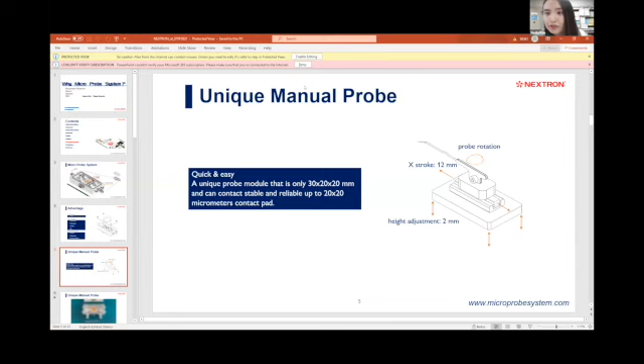Could you see my screen? Perfectly.

Good morning, everyone. I'm Nadia Kim of Nextron headquarters in Korea. First of all, it's an honor for me today to give a presentation to all of you. I also thank Professor Pascal for giving me the opportunity to introduce our product at the DTIP conference.

What I'm going to talk about today is the microprobe station, our main product. I hope you can find the answer to why microprobe systems.

I will begin by briefly looking through the contents of my presentation. Firstly, the overall explanation of the microprobe system: what is a microprobe system, and the distinguishable features and advantages over usual probe stations. Secondly, I will move to the specific model and options of the microprobe system. Lastly, I will look at the applications and customers of our product.

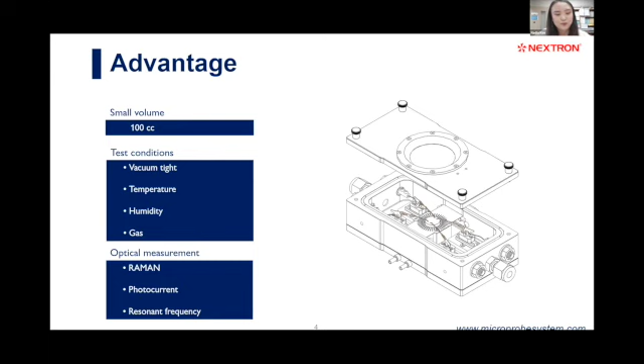The unique probing method is the most interesting point of the microprobe system. You can move the probe in any direction freely. It has a special spring structure, so it holds the sample on the stage while making electrical contact at the same time. Let me show you a short video clip showing how the probe works.

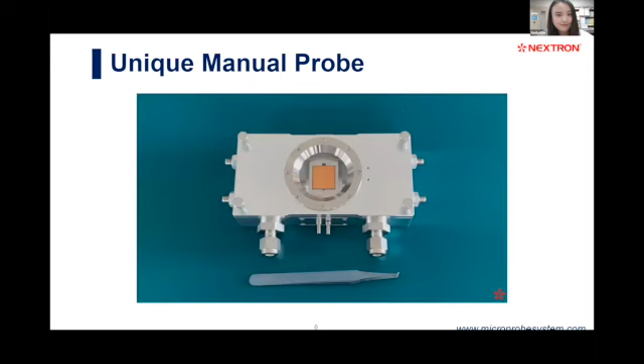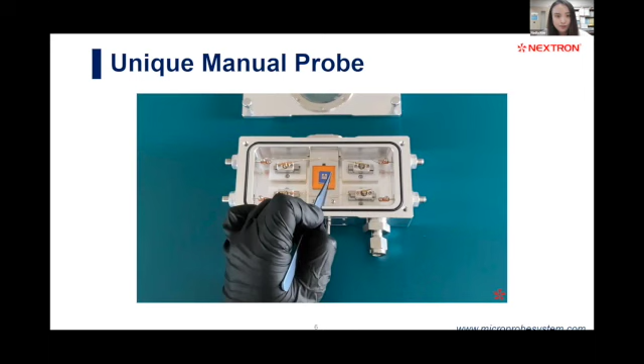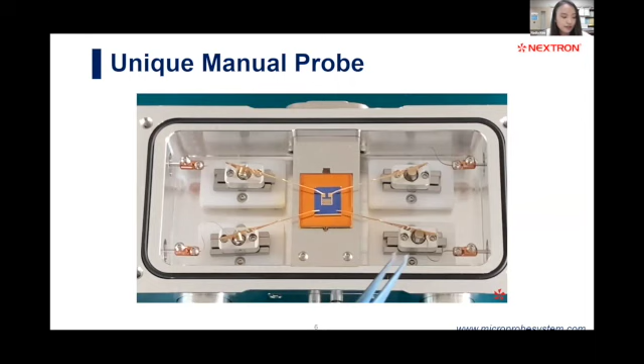First, place your sample on the stage, and you can move the probe with your hand like this using tweezers. It keeps stable contact even when the sample is moving.

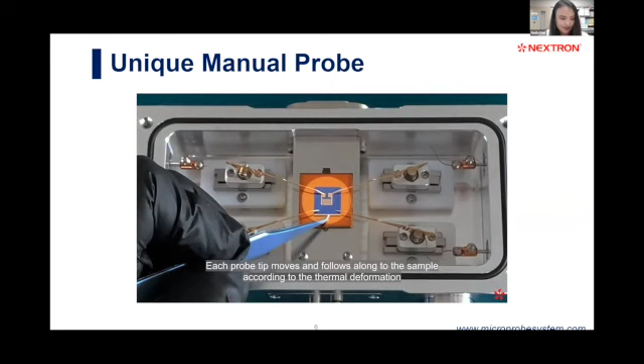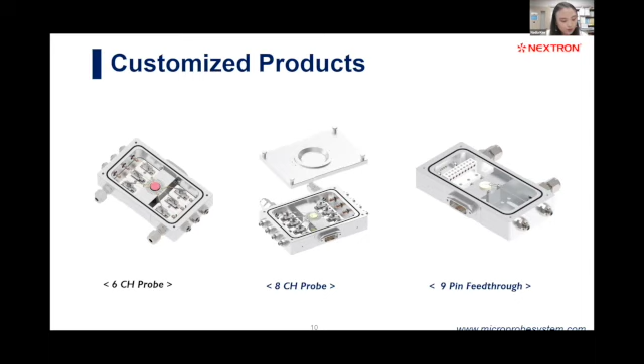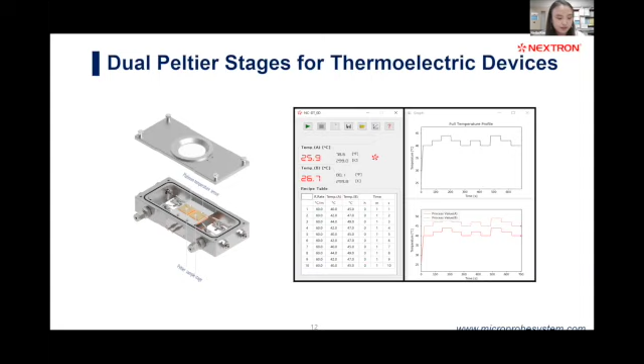This one is a dual Peltier stage for thermoelectric devices. You can make a temperature difference on the same sample during the measurement.

This is a subsidiary option for humidity control. A humidity sensor will be installed in the chamber, and the humidity will be controlled by getting a real-time feedback value from the humidity sensor.

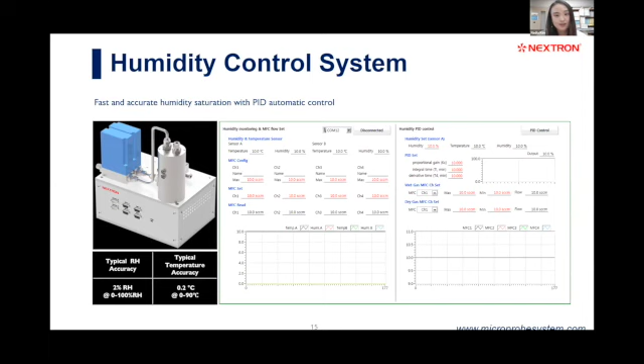This cute stage is the AFM cooling and heating stage. It can be used in AFM.

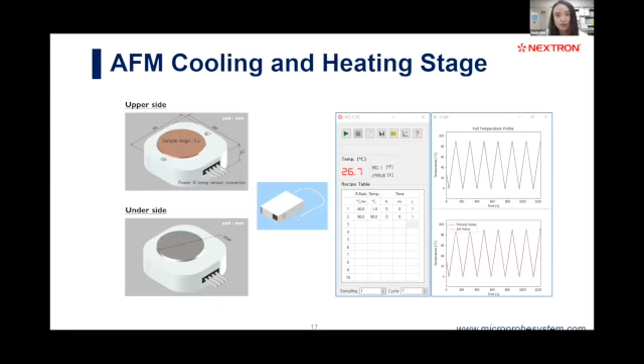This is one example of an application compatible with the microprobe system. The equipment in the picture is a vibrometer from Polytec. As shown in the graph on the right side, you can get sharper data when controlling the test condition using our chambers.

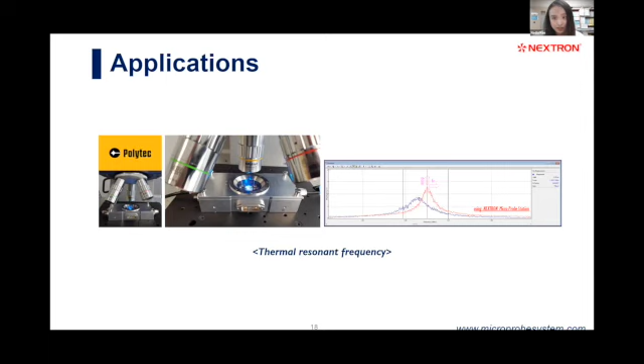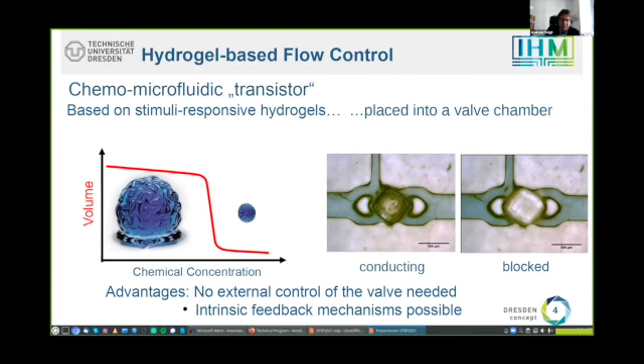The advantages of using this method are that we don't need any external control for the valve—for example, no external air pressure or control unit—and that we can employ intrinsic feedback mechanisms.

I will point out the electronic-hydraulic analogy. Like we have electronic circuits, we can also draw fluidic circuits, and there are analogies or isomorphisms between quantities. So pressure in microfluidics corresponds to voltage in electronics. The flow rate in microfluidics corresponds to current in electronics. And just as there are electrical resistors, there are also hydrodynamic resistors.

However, there's one main difference: there is no equivalent to chemical concentration in electronics. This main difference has an impact on the design of such systems, and also on the computer-aided design methods that we develop for it.

We can couple the disciplines of chemistry and fluidics, coupling the chemical domain to the fluidic domain. To couple from concentrations to flow rates, we use our chemofluidic transistor, because the size of the hydrogel depends on the concentration. If we change the concentration, the resistance of the transistor will change, so that in the end, the flow rate coming out of the transistor depends on the chemical concentration.

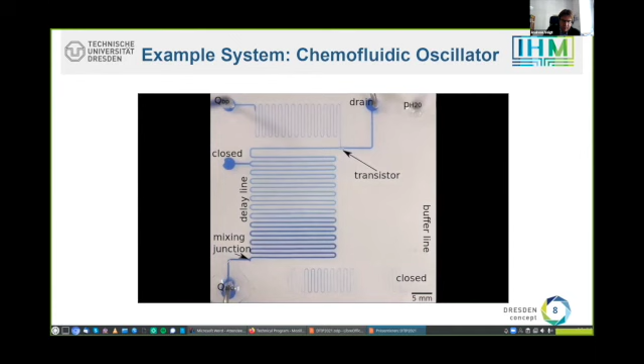Now that we know what hydrogel-based microfluidics is, I will explain our computer-aided design method. The idea is to use a schematic design. In this schematic, you see the oscillator: we have components like the buffer line, the mixer, the delay line, the chemofluidic transistor, the bypass line, and also the pumps. These components are connected by connection lines.

The blue lines correspond to flow rate-pressure pairs, which is the conservative quantity, and for the concentration we use signal flow quantities. The components are described in the hardware description language Verilog AMS, where AMS stands for Analog Mixed Signal. As a design framework, we use Cadence Virtuoso, which is usually used in electronic design automation.

The advantages of using such a schematic design instead of a full 3D description with partial differential equations and finite element methods are, first, that we have a reduced number of degrees of freedom, which means our simulations are very fast. Also, the schematic design is very intuitive, because we simply need to place the components like an electronic circuit, connect them, and then simulate the behavior.

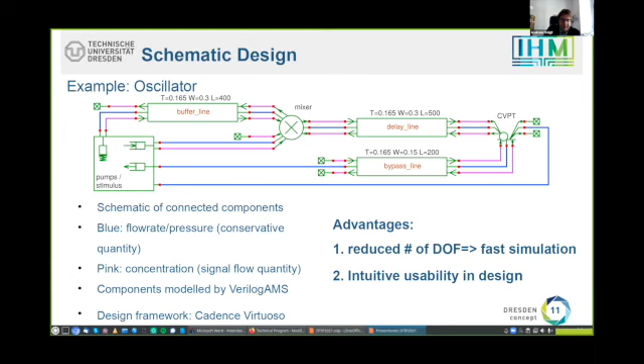I will explain how the different components are modeled. The microfluidic channel has two effects. The first effect is that it acts as a hydrodynamic resistance, so the flow rate that goes through the channel is calculated by the pressure divided by the hydrodynamic resistance. This is realized via the analog part of Verilog AMS.

The second effect is a transport delay. A concentration that comes into the channel needs some time until it is transported to the end of the channel, and in the channel there is a concentration distribution which is shifted along the channel due to the flow rate. This transport delay was realized via the digital part of Verilog AMS, because we need to keep track of the internal state of the concentration distribution. This realization, and also the coupling of the analog and digital parts, were the critical issues for the microfluidic channel.

The mixing junction has two incoming flows of flow rates Q in 1 and Q in 2, which carry concentrations C in 1 and C in 2. Then there's the channel for diffusive mixing. And the resulting concentration at the output is simply the weighted average of the concentrations, weighted by the flow rates that are coming in.

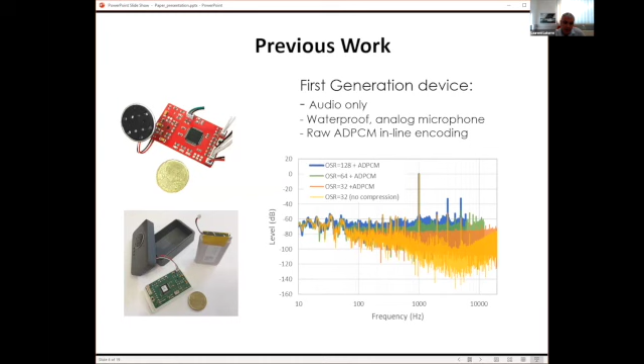We studied the effect of this compression on audio quality depending on other parameters, mainly the audio sampling rate, and we can see how the noise floor moves depending on the parameters, with and without this ADPCM onboard compression. So that was a contribution, and what we demonstrated, which was nice to see, is that doing the audio compression on board actually saves power, because doing that we have less data to store onto the mass storage, which is an SD card in our case. Most of the power consumption comes from the writing operation onto the SD card, so by reducing the amount of data to write, we actually save power, and it's better even if you include the extra power needed on the CPU to perform the compression.

So actually we could save about 30% of power when we compare with and without compression. And that allows us to develop an audio recorder that was very low in terms of power consumption, like 6 milliwatts. It was like one order of magnitude better than what you could get on the market at that time. So that was the previous work.

And what I present today is the second generation of these loggers that we call XLM, because in addition to audio recording, we also provide accelerations and magnetic field recording.

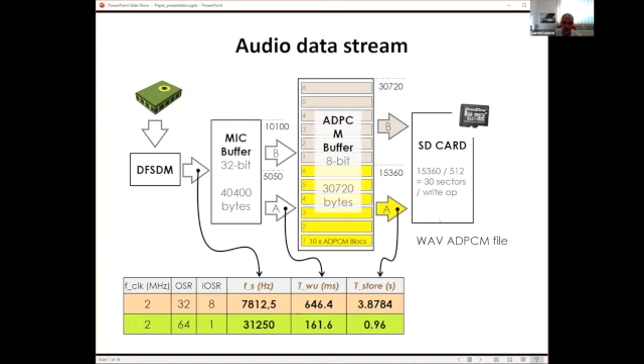And what we write on the SD card is a fully compliant WAVE ADPCM file. It's based on the Microsoft standard. So the file can be read directly on software like Audacity - a freeware that many people use in the research community. But we had to modify slightly the standard header of the WAV file to include a time code, and we do that to be able to align data with the inertial data that we collect besides audio data. So we investigated several possibilities, and we found a location in the header where we can put an extra field, which is a 4-byte field. So it's a 32-bit time code based on a hardware count, and that is used to timestamp the audio data.

So regarding the other sensors, we have accelerations and the magnetic field. Those are coming from the inertial device eCompass from ST. The buffering scheme is much simpler because we do not process the data - we just store raw sensor information into the SD card. Every sample, so every 3D sample made of X, Y and Z, is also timestamped by the same time code as we use for audio, and that's for the alignment. We have a fixed configuration of 50 Hertz output data rate for the accelerometers and 10 Hertz output data rate for the magnetometers, which leads to a write onto the SD card every 10 seconds for accelerations and every 50 seconds for the magnetometers.

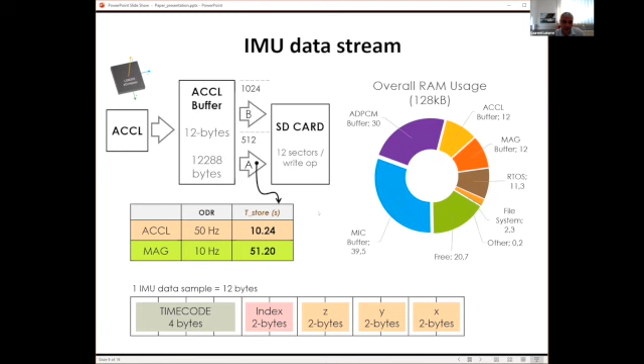When you look at the overall RAM usage, you can see that almost three-quarters of the available RAM, so 75%, is dedicated to sensor data buffering. What remains is for the rest of the firmware. Half of the total available RAM is dedicated to audio, because this is where we have the higher data rates, of course.

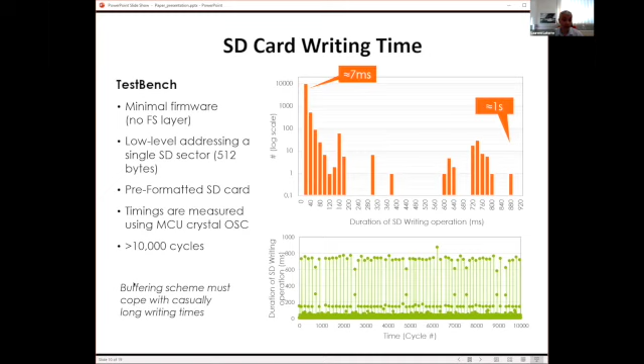We have very long writing times, and that's not under our control, because that's something that is performed inside of the SD card itself. It's the controller inside of the SD card that does some housework. We don't know exactly what's inside, but we have to cope with very long writing times. So that's something I wanted to point out, because it's something that we have to deal with.

Regarding the overall firmware architecture, given that we have 3 sensors that provide data asynchronously, the IMU has its own oscillators, and when it has data available, it just sends an interrupt to the microcontroller, and then we have to collect the data. Because of that, and because of the unpredictable SD writing times, we needed a strategy where we can use the CPU resource where it's needed, when it's needed, and only that.

For that, we used an RTOS, to be specific, FreeRTOS. Using this, we can lower the CPU frequency. We use 4 megahertz when we consider the low-fi use case, and that allows us to reduce the power consumption. During the recording process, we have 3 tasks running in parallel. Each of these tasks is just buffering the sensor's data: audio, acceleration, and magnetic fields.

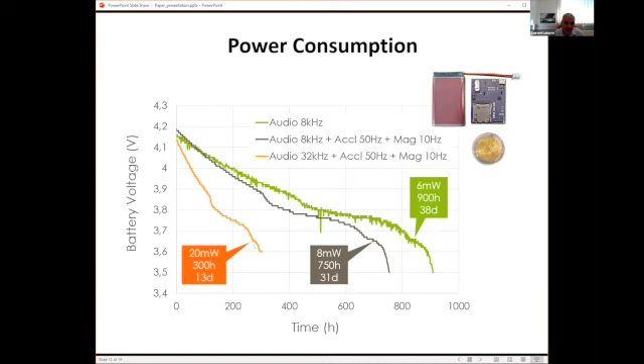The second curve, obtained with the second device using the same battery, also records accelerations and magnetic field. We have, of course, a reduced autonomy, but that's still quite good, with 8 milliwatts of power consumption and up to 1 month of full-time recording. When we consider the high-fi case of 32 kilohertz audio data rate, the autonomy is cut by more than half, but still we're close to 2 weeks of full-time recording. It has some applications, maybe not with wild animals, but with domestic animals. We have a collaboration with another research team that studies horses, and they use that high fidelity configuration.

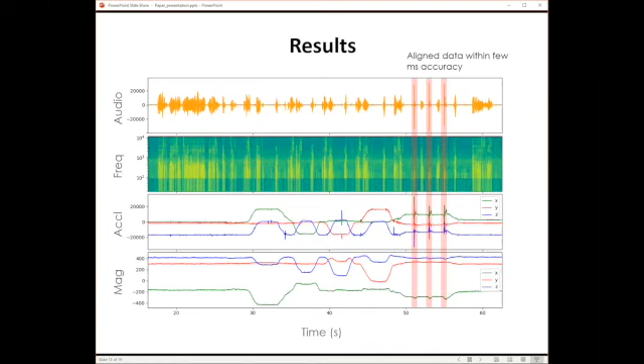Another thing that we can get from the loggers as post-process: we collect the data on the SD card. I didn't mention, Laurent, you are running a bit over time, so this can be my last one.

Okay, so the device is not communicating. We get the data from the SD card, and what I just want to show on this slide is that the data is perfectly aligned, and that's what we wanted to do.

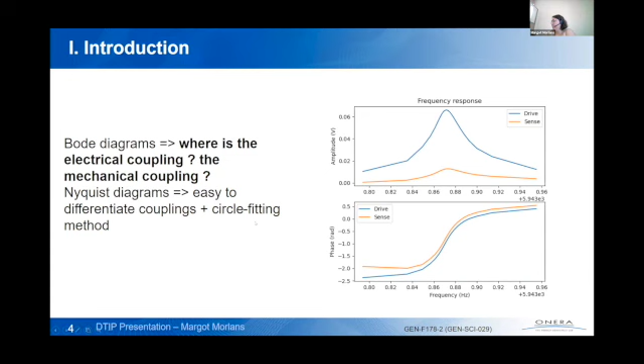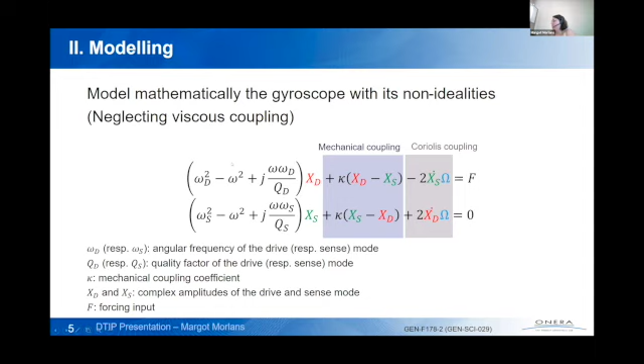So we see that in the first equation, we want only the drive component, XD, but we have a small amount of the sense signal, XS. Similarly, we have some drive signal, XD, in the sense signal, which is also mechanical coupling. These equations translate into circles when omega is near the resonance frequency. For feed-through, we have another model, which is right here.

We can see that the output of the drive mode isn't only XD, but there is also a bit of capacitive coupling here. So we have a small amount of V in. This is not a rotation. It's not due to misalignment in electrodes or any design errors. It is really due to a small capacitance between pins on the cell.

So our method: as said before, we know that when omega is around its resonance value, data points may be represented as a circle. Here we use the Kasa-Coope method for the circle fitting, which consists in minimizing the distance between a data point and a circle point. Our algorithm will find the best circle answering this constraint. When we obtain the circle, we will see later how we can differentiate mechanical and electrical couplings quite easily.

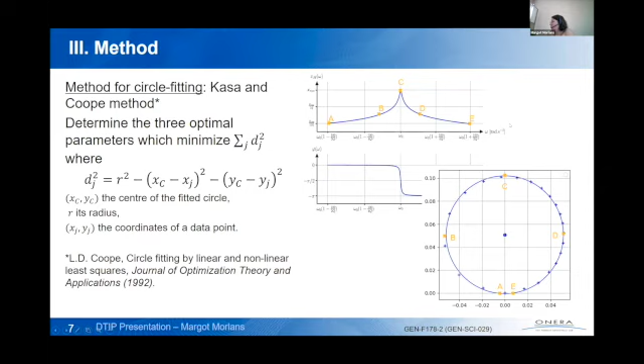Here we have both Bode and Nyquist representations, and we can see that we have 5 remarkable points. They are all on the amplitude diagram of the Bode representation, and the 5 are present also on the circle. So it's interesting to see that these both representations are 2 different things for the same data and the same equations.

So here is a simulation example to illustrate our method. We see here that on the Bode representation on the left, it is quite impossible to differentiate mechanical and electrical couplings. We can see that there may be some couplings, but we don't know what effect is due to which coupling.

However, on the Nyquist diagram on the right here, we can easily detect these couplings. The feed-through, for example, is seen here in the relative position of both circles. So here you have what we call the foot of the circle, and here also, and this relative distance is the electrical coupling. The mechanical coupling is represented by the size of the small circle.

Actually, the big circle, the blue one, is the drive circle, while the small circle, the red one, is the sense circle, as written here. The diameter of the small circle, the sense circle, represents the proportion of mechanical coupling. There is also an angle here between the circle axis and the real axis. This angle is the phase shift provided by ZD and ZS that we saw earlier.

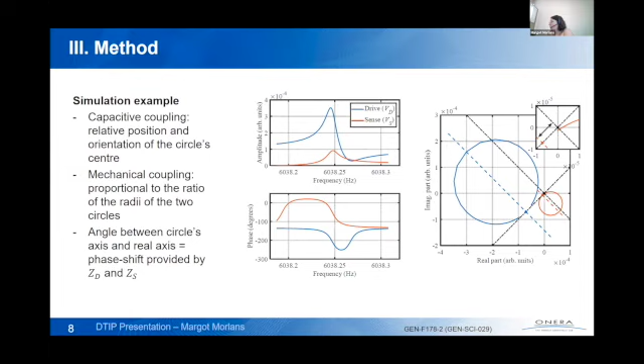Here we have a 45-degree angle for the phase shift. It is an arbitrary value for the sake of the simulation, but in real cases it may be really different.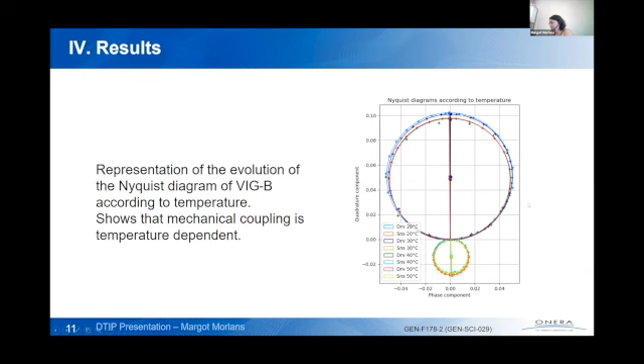So to conclude about this work and about the perspectives, the Nyquist diagram is a really useful tool for qualitative insights and quantitative characterization of electrical and mechanical couplings. It can be used to determine other parameters, such as quality factor or resonance widths. In the next months, we want to use this method to characterize matched mode gyroscopes, and we also want to investigate ways of accelerating the characterization process.

Thank you for your attention, and if you have questions, don't hesitate.

Thank you, Margot, for this clear presentation. Do we have any questions in the room?

No? This is the startup of the conference. People are... Okay, I have a small question or comment.

The idea of this paper is based on the fact that the phase is a more useful parameter to discriminate between the mechanical coupling and the electrical coupling, if I have understood well. Is it right? Actually, it's just the way.

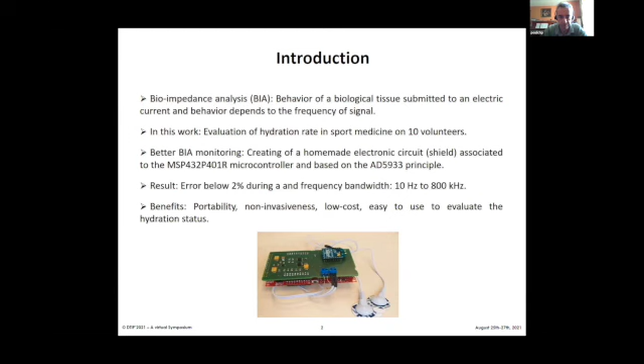So the principle of the determination is placed there. Outside, of course, is placed biologic cells, and we have two electrodes that communicate and are linked to the biologic cells. On the animal or on the patients, it's supplied with a battery, and there's a link with RF communication to the computer. When the measurement is done, it's stored on the computer, and we can analyze later.

So for measuring the impedance, we have to deliver a sine wave. We apply this sine wave on the biological cells, and this amplitude determines a current. This current is converted into a voltage, and this voltage is acquired by the microcontroller. All our work is made with Texas Instruments microcontroller placed there. When the measurement is done, we transmit to the computer, it's stored, and we can see the impedance later.

To do the measurement of the impedance with good precision, we need to calibrate. We need to adjust some parameters, because we have to understand that the impedance changes a lot. For instance, it can change from 1 gigaohm to 100 ohm. For 1 gigaohm, if we apply 1 volt, a higher voltage, we have a current around 1 nanoampere. And with 100 ohm, with 1 volt, we have a current of 10 milliamp. So the current changes a lot, and we have to adapt the impedance to have good precision of the voltage that we will acquire.

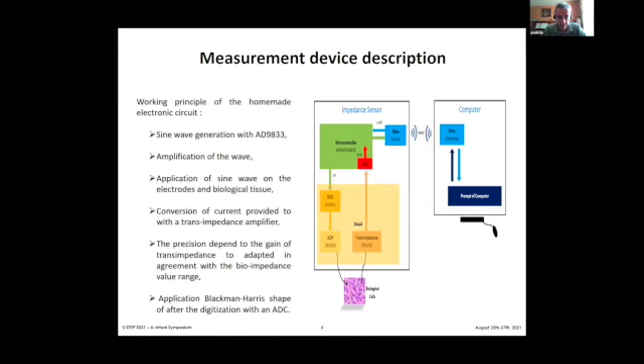So to improve the measurement, we calculate the discrete Fourier transform in order to reduce the effect of the noise, because in our case, for each value of the impedance that we want to determine, we apply one frequency, for instance 1K, and we calculate the DFT as the modulus and as a phase. After, when we have to determine, we calculate the impedance, and we replace the frequency of 1K with another frequency in the range of the frequency that we want to determine. So this is the effect of the DFT. Okay, calibration.

And here on this slide, we can see the results. First, we compare our way of measurement, our system, with a classical system composed of an analog discovery, and we measure this circuit. We see the two curves with the modulus here, with the phase there, on the modulus of the impedance of our system and with the analog discovery, and we can see from a range of 10 Hz to 800K that the difference is very low, around 1%. We also measured the impedance with a classical HP measurement device, and we can see there's no deviation. We use this device because it represents well the behavior of biologic cells.

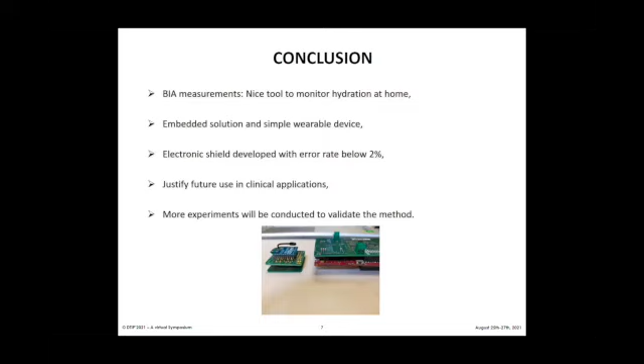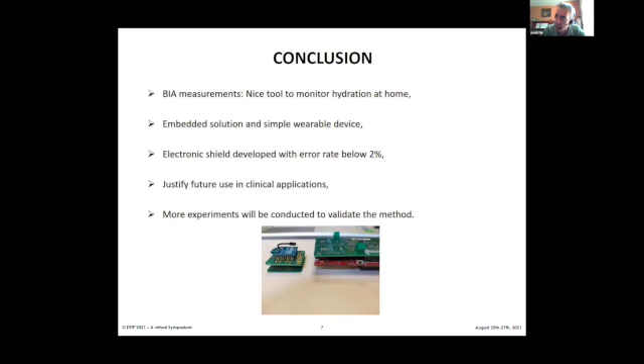I wanted to check something. You talk about using the AD5933, but do you actually use just the DDS part of it, the AD9833? No, at the beginning of our work we used the AD5933, but we replaced it. We keep the same principle of the measurement, but in our circuit we don't have the AD5933 anymore.

Is this because of needing to change the sensitivity of the transimpedance amplifier? Yes, we want to extend the frequency range, control the consumption, and adapt the DFT. For instance, if we need very low consumption, we can reduce the number of points used to calculate the DFT.

Okay, brilliant, thank you. You're welcome. Okay, we have time for one more question. If there's no question in the audience, I have maybe one.

You say you're reaching 2% accuracy in impedance measurements, but I wasn't sure if this accuracy applies in terms of systematic error, random error, and what are the main contributors to the error? I think systematic error can be neglected because we do a calibration. To be honest, we compared the results with some classical measurement devices like HP, and when we look at the documentation, the precision of those devices is around a few percent too, so we have the same range of error.

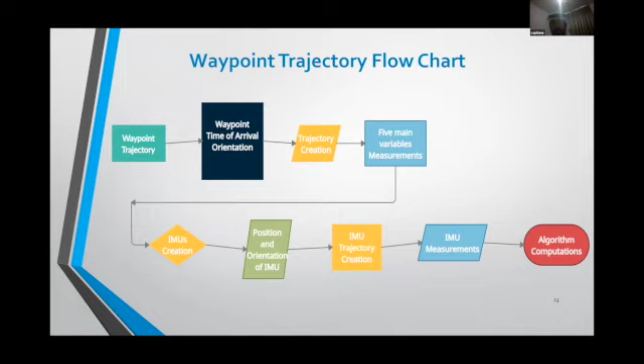I will show you only this: this is how we propose 2 trajectories. One is the waypoint trajectory, done by MATLAB. This is the flowchart, because it's a big code, a big MATLAB file. This is the location of the first trajectory, this is how we could place them, and this is the results, the algorithm computations, and the cube gyroscope. We placed a gyroscope in the center of the simulator in MATLAB, and we tested our algorithm.

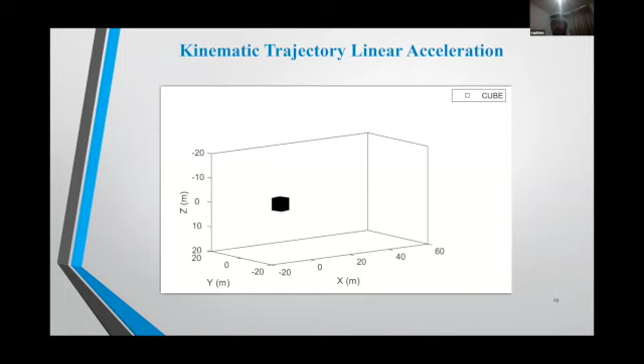We had results with very little error, and the second approach was the kinematic trajectory, and this is a video, but I could not play it here. This is the orientation of the cube, because we're injecting linear acceleration and angular velocity.

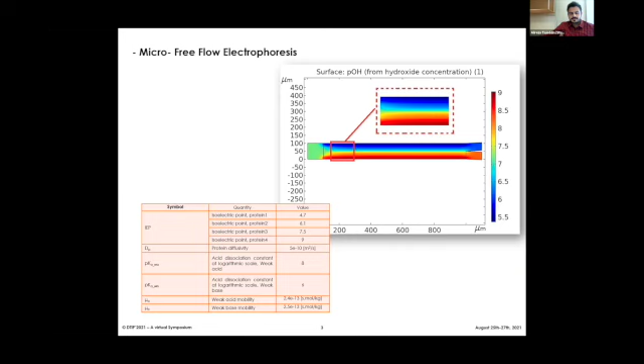Then we dealt with the design of the microcantilever, as there's a common issue where microcantilevers have a low quality factor when operating in a liquid medium. It's a common approach to address both the geometry and topology of the cantilevers. So we defined specific dimensions for our cantilevers according to our chamber and chip size, and used a topology optimization based MATLAB code to reduce the structural material by 40% and reduce the stiffness, giving better sensitivity and deflection.

We found almost 36% improvement in terms of deflection when we applied this optimization.

Then we went for the detection range of the proposed geometry and dimensions for this microcantilever, which was again done using COMSOL software with fluid structure interaction. We did this for different concentrations of hydrogen ion that might be available in the chamber. The current design and proposed dimensions are somehow feasible and give good signals, like 1 micrometer deflection, which can be read out with different approaches like piezo-resistive materials or, more simply, optical beam measurement.

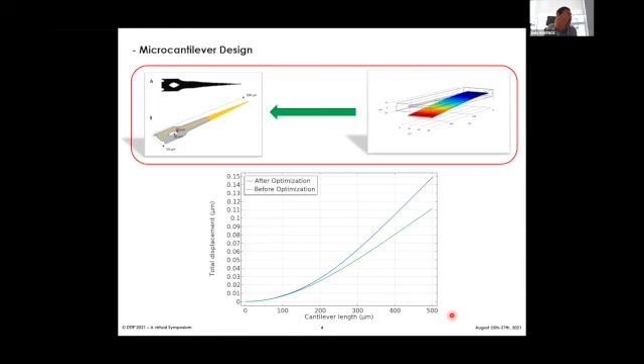So the principle of operation of your sensor is simply the separation of the flow by the cantilever, and this is enough to make sensing. Did I understand well? Yes, exactly.

We actually sense the hydrogen, the produced hydrogen in the buffer in the chamber, from the reaction with the buffer system. So this produced hydrogen is in relation with the introduced ions, like the hydroxide ion. So what we measure, the deflection, is just what we have as pOH, so we can easily convert it to the pH of the medium or the entering liquid.

I understood well, it's a very original principle of operation. So thank you very much. Thank you. Thank you for your question.

So yeah, we are just trying to design the fabrication process. We are studying about the materials, because we are dealing with electrophoresis, and at the same time, on the other side of the chip, we have these micro cantilevers. So we need some sophisticated microfabrication with electrodes and different considerations, because in the electrophoresis we may introduce some bubbles that we need to prevent, so they don't clog our channels. So in the sense of microfabrication, it's our future work.

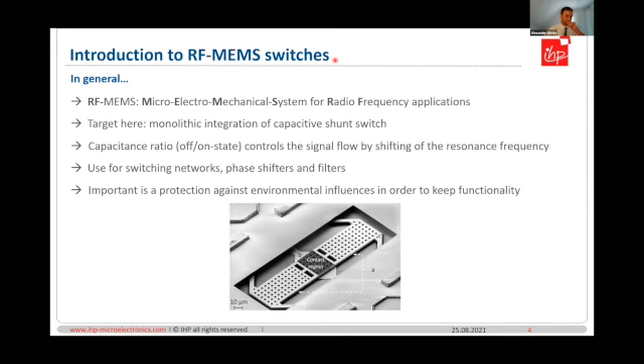In detail, the switch consists of high voltage electrodes designed in metal 4, an RF signal line in metal 5, and a suspended membrane in top metal 1. All parts are integrated in the upper part of the 7 metal layer backend of line. Here is a schematic, and here is an SEM image, and in the cross section of this schematic you can see the HV electrodes, the RF line, and the top metal 1 membrane.

As a switch, there are 2 states: on and off. In the off state, no voltage is applied to the HV electrodes, the distance between the signal line and the membrane is maximum, and the capacitance is low, so the signal passes with almost no loss. In the on state, an applied voltage exceeds the pull-in voltage, the membrane is electrostatically attracted, the distance is minimized, and the contact capacitance is maximum. The signal is now coupled to ground, and the switch is in isolation.

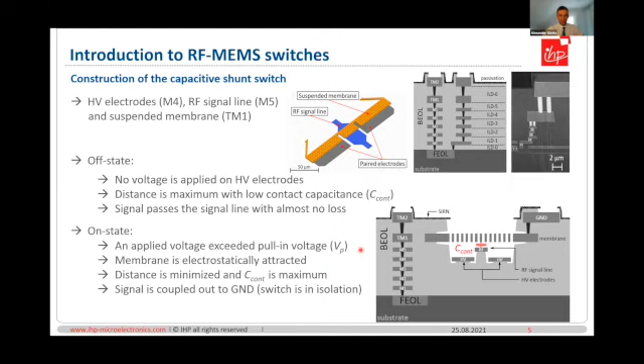As I already said, the switch was already initially integrated, so the conditions for my work are as follows. First, the metal stack is adjusted for an up-bent membrane center, which you can see in this image recorded by a white light interferometer. The target is a high membrane center for minimum insertion loss and low membrane sides for minimum pull-in voltage.

Furthermore, the MEMS releasing is done by a wet chemical etch of the sacrificial ILD silicon oxide, together with an overflow rinse and spin rinse dryer with hot nitrogen. Finally, the passivation nitride is replaced by silicon-rich nitride to increase the wet etch selectivity against silicon oxide from 19 to 71.

Before I start with the backend of line modifications, I want to highlight that every modification done is based more or less on the following facts. The ILD silicon oxide deposition on patterned surfaces could create boundaries and sidewall silicon oxide with increased etch rate. Additionally, a 40 times higher thermal expansion coefficient of aluminum copper relative to silicon oxide induces up to a 3 times higher etch rate for the sidewall silicon oxide. Finally, there is a need for encapsulation against environmental influences.

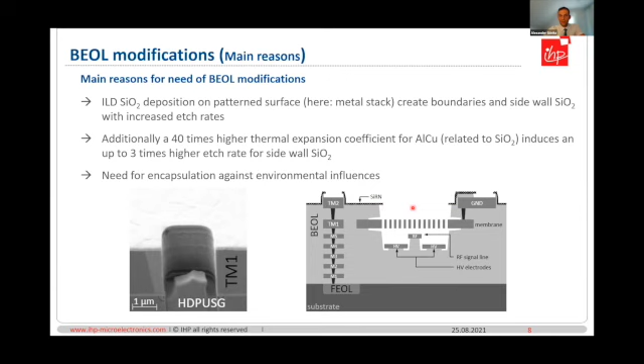The first issue I want to show is the parasitic vertical release at electrodes. You can see this in a tilted SEM image here, where the electrodes, or in this case one electrode, is already underetched. In actuation, with a high actuation voltage, it can occur that we have a short.

There's a high risk for an electrical short due to non-insulated, partly released electrodes. The solution is a silicon-rich nitride-based etch stop layer, located on metal 4 as shown in the schematic. This heavily reduces the risk for electrical short, as you can see here in this tilted SEM image—there's no underetching.

The next issue is a parasitic lateral release, which mainly affects the arm length of the membrane. It's shown here, and in the SEM image zoomed in. There's the problem that an undefined, enlarged membrane arm length reduces the spring constant and stiffness of the membrane, so the electromechanical performance is completely changed.

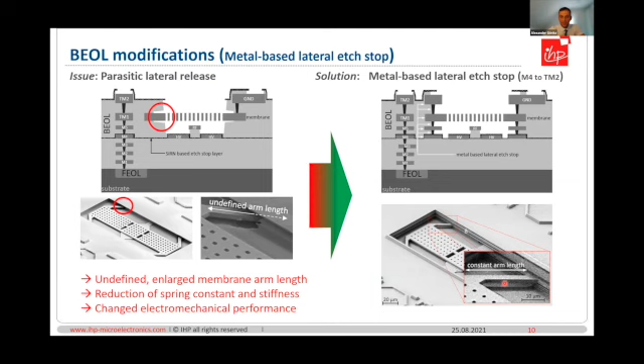The next issue is vertical passivation nitride, which occurs due to the standard back-end-of-line topography on top metal 2 grid for encapsulation. This actually belongs to the encapsulation, but from a fabrication point it belongs here. In cross section as a sketch, you see the top metal 2 grid, and this should mean a hole. Due to standard back-end-of-line topography, we have vertical nitride.

If we open the passivation nitride in order to release the MEMS, we have remaining vertical nitride, and this blocks the MEMS release. If we want to get rid of this, one option was to just etch more, but then in the end we have wider holes, so this was not actually possible to use for encapsulation.

The solution was to have a leveled passivation silicon nitride. For this, we have an additional deposited oxide, which after that is leveled to top metal 2 at 1.5 micron, followed by a silicon-rich nitride deposition. So after opening of the MEMS area, even the standard area has normal states and no vertical silicon-rich nitride. This enables MEMS release and encapsulation.

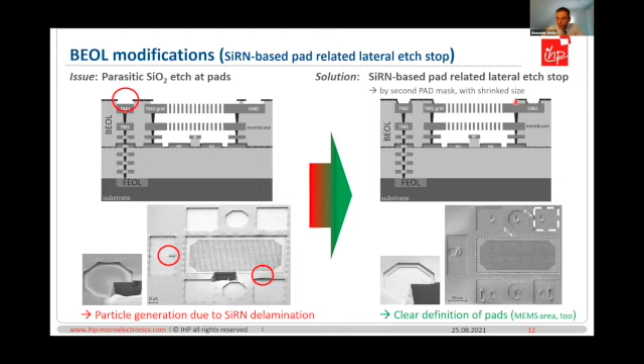Finally, there's still a lack of MEMS protection, so humidity and particles can destroy the MEMS function. In order to provide feasible protection, the thin film wafer level encapsulation is done by a high deposition rate silicon oxide deposition at 200 degrees C, with a target height of 4000 nanometers on top of the top metal grid. Afterwards, the pad reopening by RIE and the subsequent resist removal by an ashing process at 220 degrees C has to be done. You see this right here.

This is actually the final state of the fabrication of this switch. We have here the release membrane, and you can see also here the signal line, and here part of the electrode, the top metal grid, and the oxide deposition—the thin film wafer level encapsulation is completed here. In this SEM image, you see that the holes are completely closed.

So this is a cross section of this here.

After fabrication, the RF-MEMS switch is tested by a CV measurement, using a high-frequency impedance analyzer. The actuation voltage range is from -65 to 65 volts at a voltage step width of 5 volts. The capacitance measurement starts at 0 volt, ramps up to 65, ramps down to -65, and ramps again to 0 volt.

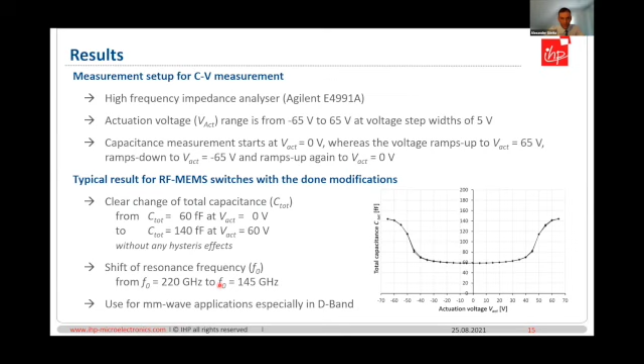A typical result of the RF-MEMS switch with the done modification is displayed in this graph. We can see a clear change of the total capacitance from 60 femtofarads at 0 volt to 140 femtofarad at 60 volt, without any hysteresis. This shifts the resonance frequency from 220 gigahertz to 145 gigahertz in terms of RF performance, enabling use for millimeter wave applications, especially in D-band.

So finally, I want to summarize my talk as follows. The aluminum copper-based RF-MEMS switch parts are embedded into the backend of line ILD of the 130 nanometer SiGe BiCMOS technology. The RF-MEMS switch releasing is done by a wet chemical etch of the sacrificial ILD silicon oxide. Appropriate etch stops are created due to locally higher etch rate, which is based on both boundaries and thermomechanically stressed silicon oxide. A thin film wafer level encapsulation using a high deposition rate silicon oxide deposition at 200 degrees C on top-metal grid is realized for protection against environmental influences. Finally, the measured capacitance and its clear change switches the signal within frequencies of D-band.

As a final conclusion, the RF-MEMS switch is successfully integrated into the backend of line of the 130 nanometer technology for use in D-band applications.

Thank you for your attention.

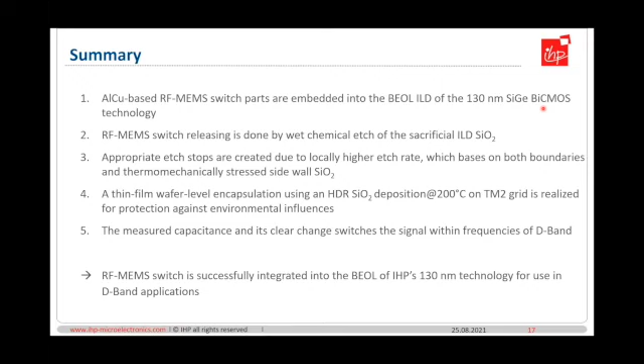It's about the high rate deposition of silicon oxide. What kind of reactor do you use to obtain such a high thickness of silicon oxide?

It's actually a CVD process, but the reactor, I have no idea, a colleague is doing this. I can tell you that it is a 30 nanometer per second deposition rate, using silane, at a pressure of 3 to 4 torr. It's a pure CVD process, yes.

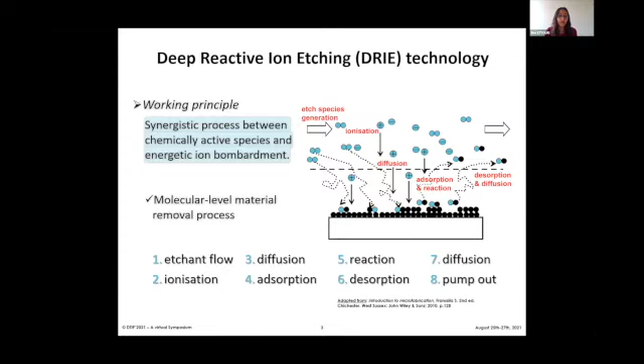The subject can be looked at under the following headings. Depending on the equipment and the process parameters, plasma etching can be compared to a so-called chemical etching, due to the reaction of the chemical species present in the plasma with the surface of the substrate. The substrate is etched uniformly in all directions, which we call isotropy, giving semispherical etching profiles, which can cause problems when etching very small dimensions. Then there is so-called physical etching, generated by the bombardment of the surface, where species can be etched. For example, this process can be similar to sputtering. Both ways have benefits and drawbacks according to the application.

A continuous SF6/O2/Argon plasma process was investigated. The effects of the process gas flow rates on the geometrical features of the etched trenches, like the nickel hard mask etch rate, the etch depth, the sideways undercut, the profile angle, and the sidewall surface roughness were studied. The experimental results obtained after the etching suggested that tapered vias of varying profile angles can be formed by balancing the chemical-assisted isotropic etching, the passivation film by oxygen, and ion-assisted passivation etching.

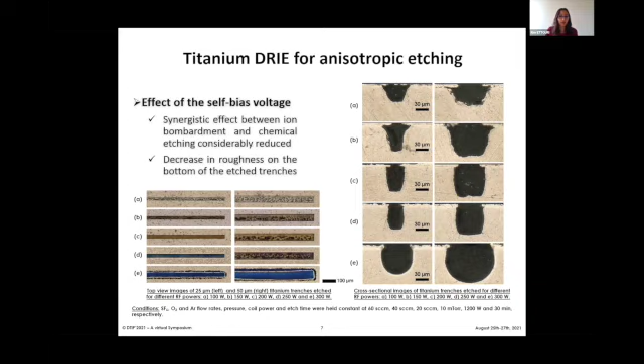The synergetic effect between ion bombardment and chemical etching is considerably reduced, resulting in a stabilization of the etch rate and profiles that tend towards anisotropy, with the most suitable one being D. It is also consistent to observe, as shown in the second figure, a decrease in roughness on the bottom of the etch trenches as the self-bias voltage increases. However, it should be noted that the variations are synergetic with temperature, and care should be taken in interpretation.

Let me briefly summarize the main issues. The experimental results obtained suggest that trenches of varying profiles can be formed by balancing the fluorine radical-assisted isotropic etching, the oxygen passivation film, and the physical bombardment to which argon contributes strongly. An optimized etching process was obtained, and profiles with straighter sidewalls were obtained. However, trench openings were slightly enlarged.

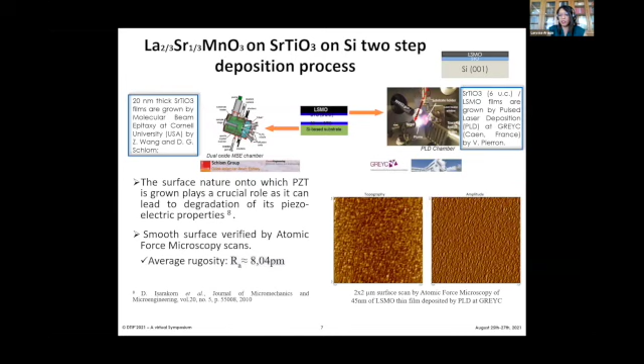Here you can see an image in atomic force microscopy for our deposited LSMO with a very low rugosity, in the order of picometers. It's a really good surface, and this is the base for our growth of PZT material.

For the PZT, we chose this composition because it's in the morphotropic phase boundary of the PZT, so all the piezoelectric coefficients are maximized, we have the best optimization of the material itself. We can deposit it by sputtering, either at room temperature, that's our main objective, but after we do a rapid thermal annealing just to guarantee crystallization of the material, or by high temperature, at 600 degrees.

The other option is to do it by sol gel, which is a chemical wet deposition, and after we also do the RTA for the crystallization.

Our films were characterized first by X-ray diffraction, a method to evaluate the crystallization of the films. All the peaks showed that the PZT was C-axis oriented, so it follows the orientation of our STO and LSMO. We have a good epitaxy for all 3 films deposited.

For the piezo force microscopy, we use it with the atomic force microscopy. It's a technique that allows imaging through this microscope of piezoelectric or ferroelectric material domains. First, we use a diamond tip to contact the top of the PZT, and the bottom electrode is the LSMO that we deposited. By applying an AC drive voltage, we have a deflection of the tip that's measured at the photodiode.

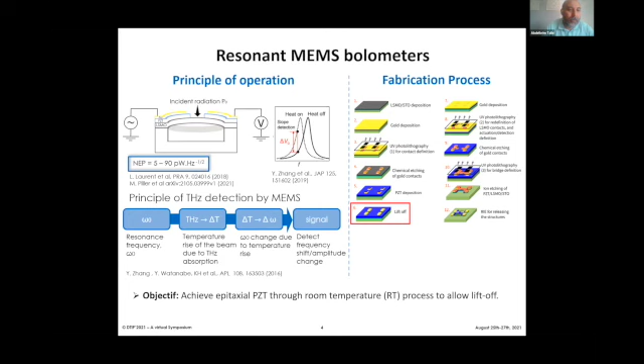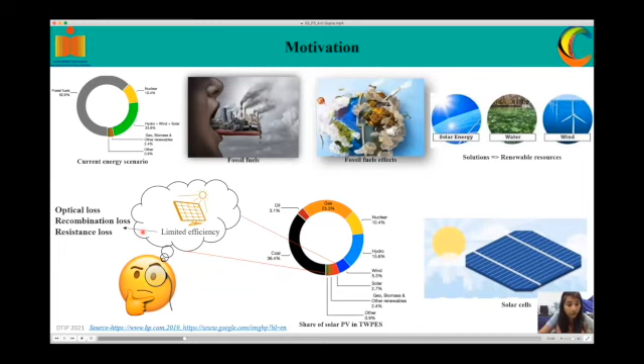Among all renewable energy sources, the sun is an evident source of energy. Solar energy can be utilized by making solar cells as energy harvesters. However, solar photovoltaic contributes only 2.1% of the total world energy supply, which is very low, despite having huge potential. This is because of the limited efficiency of solar cells, which results from three different losses: optical loss, recombination loss, and resistance loss.

I will discuss the optical loss of solar cells in detail. Optical losses consist of light that could have generated an electron-hole pair but does not, because the light is reflected from the front surface or because it is not absorbed. For the most common semiconductor solar cell, the entire visible spectrum has enough energy to create electron-hole pairs, and therefore all visible light would ideally be absorbed.

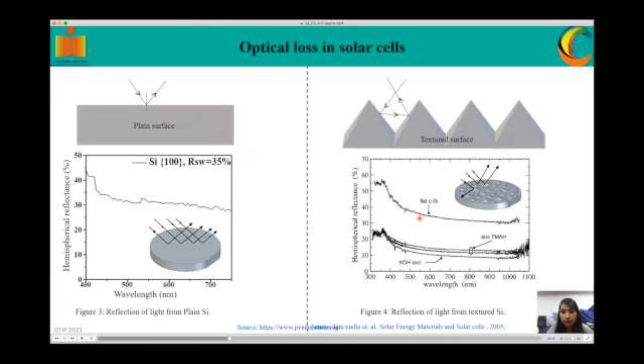Here, we try to fabricate the light-trapping structures by using a very simple and cost-effective wet etching technique. Etching of silicon 100 in alkaline solution results in pyramids or holes bounded by 111 planes. Such kind of geometrical structures work as excellent light-trapping structures and may potentially help in efficiency increment of solar cells.

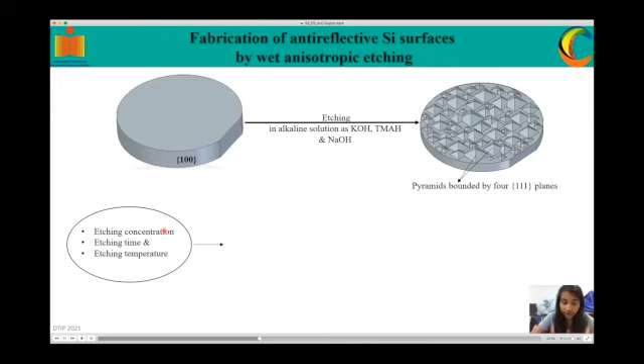Optimization of etching concentration, etching time, and etching temperature is needed to produce a uniform and dense surface morphology. In case of a non-dense and less uniform surface morphology, light hitting one place may not get any nearby structure to take a second bounce and can go back to the atmosphere. Whereas in case of a dense and uniform surface morphology, light will easily take multiple internal reflections, and this will help increase the optical path length of the light.

In this work, we studied the effect of etching concentration and etching time on surface texturing of silicon. Figure 1 shows the steps involved in the experimental process. First, silicon samples were cleaned in a Piranha bath, followed by 1% HF cleaning. Then etching was done using different concentrations of KOH. We varied the etching concentration from 1% to 0.1% in steps of 0.5%, at a fixed temperature of 70 degrees C. After etching, samples were again cleaned in DI water and then dried using an air blower, after which samples were used for characterization.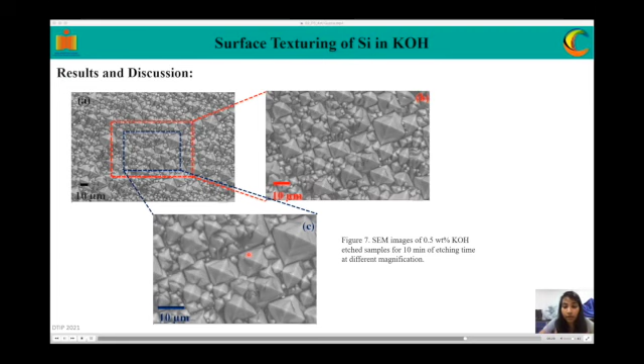Again, we performed surface morphology studies for the 0.5 wt% KOH etched samples. Here we found the lowest reflectance value, as we can observe. So the structures are more dense and uniform in the case of this concentration.

In conclusion, reflectance decreases with decreasing etching concentration down to 0.5 wt%, where a further decrease in etching concentration results in increased reflectance value. Reflectance was lowest in case of the 0.5 wt% samples, around 12%. Surface roughness value increases with increasing etching concentration and also with etching time. However, the least standard deviation in surface roughness value was observed in case of the 0.5 wt% samples, which confirms improved surface morphology in terms of uniformity. This may be the reason for the lowest reflectance under these conditions.

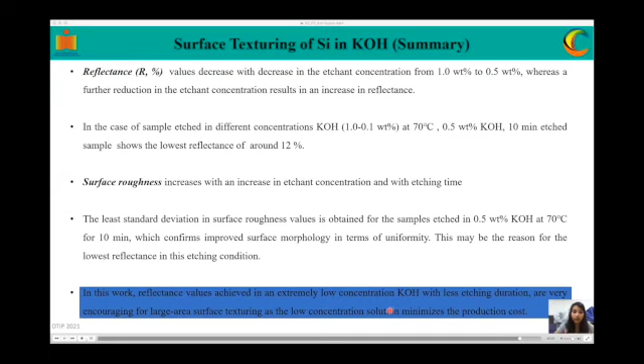The novelty of this work is that we achieved the lowest reflectance at a very low etching concentration, only 0.5 wt%, and also a very low etching time, only 10 minutes. So these conditions are very favorable for large area surface texturing for solar cell fabrication.

At last, this is all about the deep study of our research. I would like to acknowledge all our funding agencies and collaborators. Thank you everyone for your support and for your kind attention. Stay healthy and stay safe.

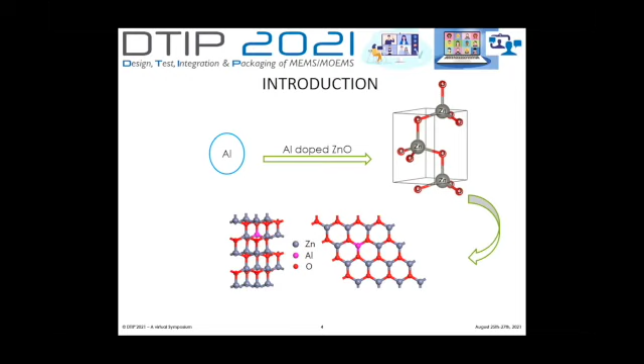Transparent conductive oxides are gaining popularity because they can be made as N-type and P-type conductive material, suiting the ever-increasing demand of current technology. Recently, indium tin oxide is the most popular commercial TCO material, but it's expensive and indium scarcity may occur in the future. In order to find a suitable ITO substitute, a group of materials has been studied so far. This group contains zinc oxide and aluminum-doped zinc oxide. Zinc oxide film has good electrical and optical properties, low chemical compound cost, and is non-toxic. However, when zinc oxide film is doped with an impurity like aluminum, the resulting film provides high conductivity. Therefore, this AZO film is the most superior substitute for ITO because it has good electrical and optical properties, is non-toxic, abundant material, and has low manufacturing cost.

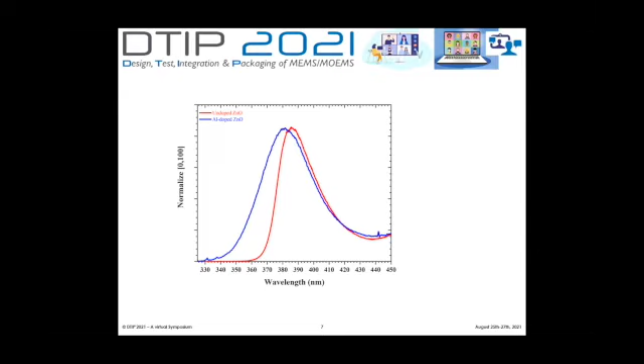Shown in this figure is the photoluminescence spectra of undoped ZnO and the AZO film. In this film, a characteristic narrow emission band is observed in the UV region, and a broad band covering the near visible region, which is attributed to the emission of near band edge and defect level emissions. It's generally believed that the narrow peak in the spectrum is due to free exciton and exciton complex. The visible band observed at room temperature is due to the recombination of electron-hole pairs trapped at defect centers, both intrinsic and extrinsic, within the optical band gap of the material. For undoped zinc oxide, the NBE emission increases rapidly, while the NBE intensity of AZO is reduced by aluminum. The peak of NBE emission shifts to the short wavelength side with increasing doping, resulting in a blue shift.

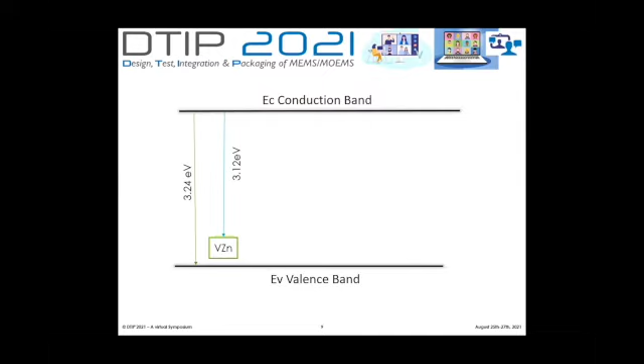We deconvoluted the AZO PL spectra to understand the influence of Al on the optical properties of the zinc oxide film during preparation. We have collected all peak locations in this data. The first peak is attributed to exciton or band recombination. The second peak is the blue color, corresponding to the transition between the conduction band and zinc vacancy or zinc antisite defects. The third peak is the green emission, and we discuss the origin of this green emission.

It's the transition from the deep donor level of oxygen vacancy and interstitial zinc atom to the valence band. The fourth peak is the yellow emission, which is due to the interstitial oxygen and the conduction band. The fifth peak is the orange-red emission.

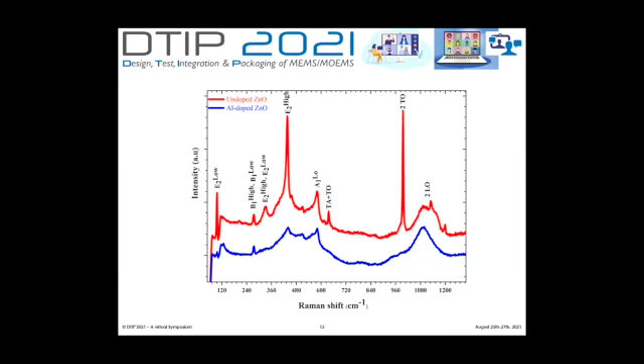Aluminum nitride and zinc oxide materials have piezoelectric properties that complement each other at low velocity. Zinc oxide has a comparatively high coupling coefficient, while aluminum nitride has a low K with a really high velocity. This result shows that growth of c-oriented thin film is possible using the sol-gel method and lower annealing temperature.

The interest in using zinc oxide sol-gel as a piezoelectric material and piezoelectric device opens up opportunities for high frequency, biocompatible, and flexible technology in modern applications.

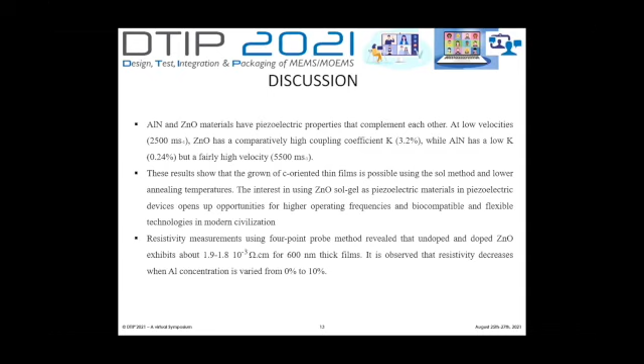Resistivity measurement using the 4-point probe method revealed that undoped zinc oxide has a resistivity of about 1.9 to 1.8. It's observed that resistivity decreases when Al concentration is varied from 0 to 10%. Transparent conductor aluminum doped zinc oxide thin film also attracts significant attention and is widely used in thin film devices such as thin film transistors, solar cells, gas sensors, piezoelectric devices, and biosensors.

In summary, we have investigated the properties of zinc oxide and AZO thin films for their potential use in piezoelectric, microelectronic, and optoelectronic applications. Undoped zinc oxide and AZO thin films are polycrystalline with transmittance of more than 80%. This decreases when Al is doped onto the zinc oxide, which increases the metal to oxygen ratio.

The c-axis 002 orientation of the undoped zinc oxide thin film annealed at 400 degrees was successfully demonstrated. We hope that the 002 peak can disperse with Al concentration. Thank you for your attention.